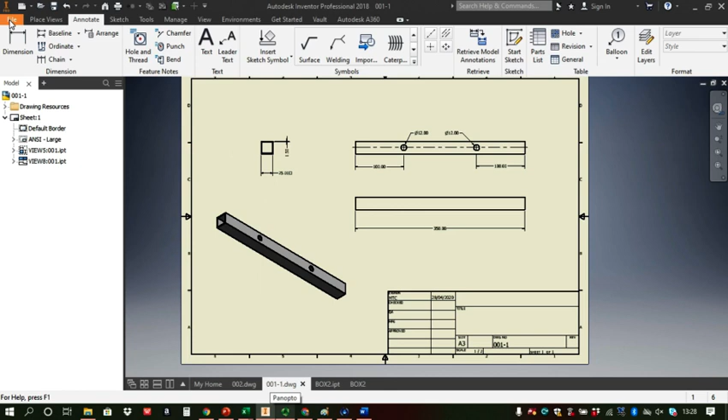So simply on Inventor, and just to demonstrate that, if I have a drawing such as this one, I can go File, and eventually it will come up, Export to PDF. And as soon as you export to PDF, it will give you that file as a PDF, and allow you to upload it to the classroom nice and simply, and guarantee that I can view it.

Now, on the 21st of September, when you hand in, I will only have a few days to mark everybody's work and get it to WorldSkills UK in order to make sure that we have time to book hotels, get the list out, get the invites out, and everything else that's got to be done in order for you to compete in November. So if you make the mistake of not putting the PDFs in there, there's a chance I will not get a chance to ask you for them. So please try and make sure that you've got the right information in the right places and this section done as PDFs.

So once you're in the classroom, as we've just demonstrated, there are several categories. National Brief contains the brief for the November finals, Qualifier Brief for that, YouTube video links, with some videos to help you and guide you through. Competition readiness, so supporting documents. There's a nice little document about competing and the kind of things we're looking for, and your team evidence upload.

So whatever your team name is, please don't upload it to somebody else's, and if you can, make sure your team name is on every single document. Okay, so the qualifier brief. The brief concentrates just on some elements, so obviously I've had to adapt things and change things to suit the current situation. So it's only elements of the full national brief and elements that can be completed using remote working and IT only. You're asked to complete each of the criteria and upload the evidence for this to the Google Classroom, as we've just gone through.

And I'm just going to depart from the PowerPoint again and just show you how to do that for those who don't know. Okay, so I'm in Inventor now, and I have a simple 3D model, a piece of box section with 2 drilled holes in it. And what I'm going to do is I'm going to right click up on the top left hand corner, and I'm going to go to iProperties. So the master on the box, right click, and I will get this up.

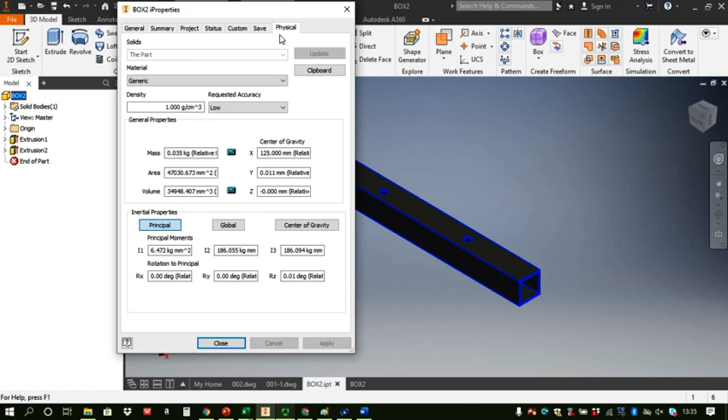Okay. At the end is the category physical, and physical will at the moment just say generic material. It won't tell me what the material actually is. I've got to tell it. Now, you may be making it out of steel, aluminium, it could be a plastic part, whatever it is. So on this drop down menu, let's say it's polycarbonate, then we go to polycarbonate. This is actually made of steel, and to be honest, it doesn't matter which steel you select. Inventor has a default density for that, and it will work it out to that default density.

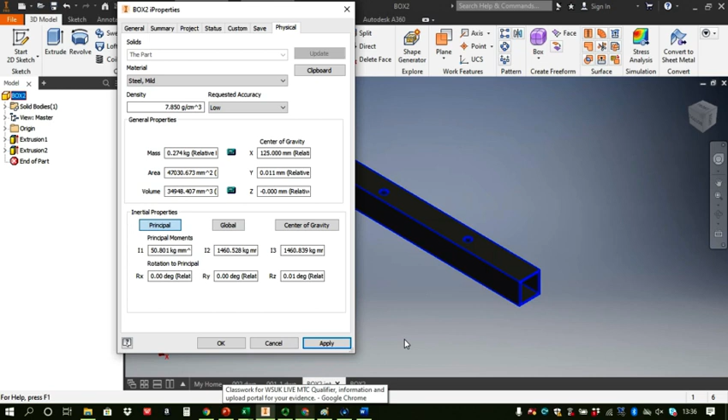So I'm actually going to go for mild steel, and it tells me the density is 7.85 grams per cubic centimetre, which is about 7,850 kilograms per cubic metre, same thing. The requested accuracy, high, medium or low, doesn't actually matter, it makes very little difference. So here it tells me that the mass is 274 grams. So I can put into my spreadsheet 274 grams for that item, then the number of items and multiply it obviously, but a screenshot of that and clearly showing the part name or part number at the bottom would be absolutely brilliant. That's the best way to demonstrate that you've done it via CAD.

So those screenshots then can be uploaded onto the Google Classroom. So what I would like to see is a spreadsheet of this format showing all the weights, and 5 screenshots that you can put onto Word or Google Docs or something similar. You might even be able to tag them into the spreadsheet if you wish, clearly showing what I've just demonstrated regarding the weight that Inventor is calculating. Of course, I also need the total weight for all of the manufactured parts.

Now, I realise that you are not going to be able to do every single nut and bolt, you're not going to be able to calculate the electronic components weight, etc. So we're only looking for the total weight of the raw metals and materials and parts you've designed at this point. When we get to the national final, of course, the entire system will be weighed. So that will be slightly different, and your weight will increase obviously from this calculation. But just to give us an idea of who's designing what and how well it's designed in terms of weight, this is the way we're going to do it for the qualifier.

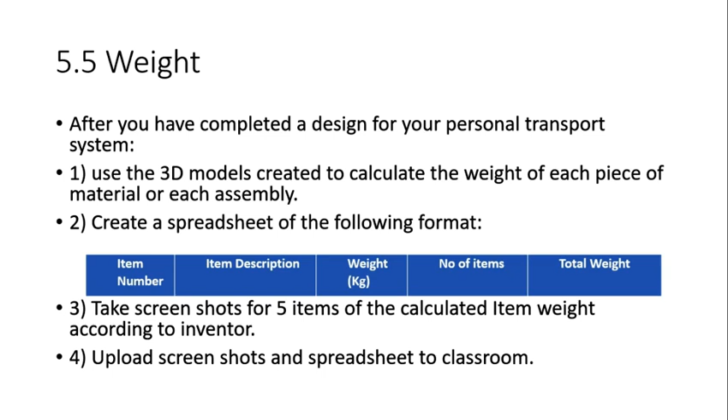So ergonomic hand controls. You will need to design your hand controls on CAD again, and I'd like to see 6 view screenshots of your hand control design. So it could be on an angle, it could be the flat elevation, so 6 sides. Can you annotate and give me a description of what it's showing? So I'm showing the left hand side, I'm showing the right hand side. This is where the dead man switch goes, but you must show me the dead man switch and the method of speed control.

Now you can do that through drawings and annotation, and also I'd like to see the size of the handle to prove it fits in one hand. It's okay seeing a drawing, but it's not relative to anything. It might be too small for my hand, it might be way too big for my hand, you might have made it 35 meters long, but I need to know that. I need to know it's reasonable to fit.

5.8, we have a manual propulsion system. Now, as discussed in the briefing video for the full national final, any manual propulsion system is fine, but it must fit either on the vehicle or be part of the vehicle, or it must fit in the rucksack with the vehicle. So I need a design for that manual propulsion system, or I need to see a part assembly for that manual propulsion system, and I need you to annotate, write out exactly how that works.

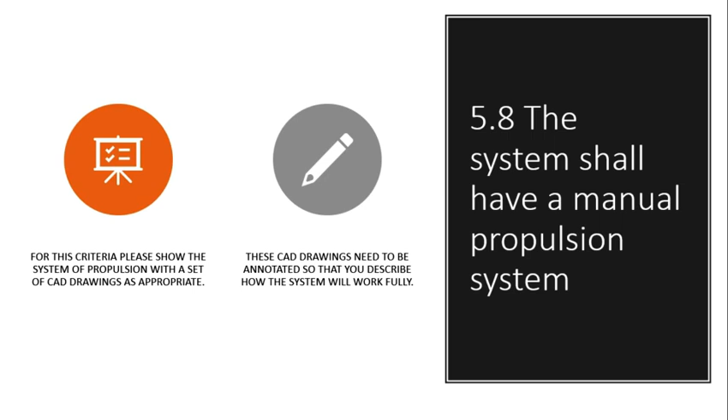So for example, it may be a ratchet where you pull a front handle on a scooter and the ratchet moves the front wheel, in which case I need you to describe what the ratio of gearing is, how far it will travel on one pull, and all the other details pertinent to that system, as well as some very, very clear drawings to show how it works.

Stopping in a safe distance. So for this criteria, I need you to show me how the braking system works with a set of CAD drawings similar to the previous one. And again, these need to be annotated to describe. So for example, you may have a brake caliper from a push bike on a wheel. So I would need to see the wheel, the caliper, the brake disc, and the mechanism of actually activating the brake pads.

So that could be a hydraulic system off a push bike, it could be cable fed off a push bike, you may have a completely different system and you may be using electronic braking on the motors. Whatever it is you do, I need you to be very specific and tell me what it is and how it works, and show me the drawings for the entire braking system from one end to the other, how it's controlled, etc.

Speed test then. Clearly we can't do a speed test, you won't have a physical item and I won't be with you. Normal qualifier, we'd have had a bit of fun running this up and down at a distance to see how fast you could go. So what I'm going to have to resort to for this time is you will know the rated motor speed for your motor or motors that you're using to power the item. You will know the gear ratios, if there are any. You will know the pulley ratios, if there are any. Any kind of gearing used, you will know those ratios, and you will know the wheel diameter you're using.

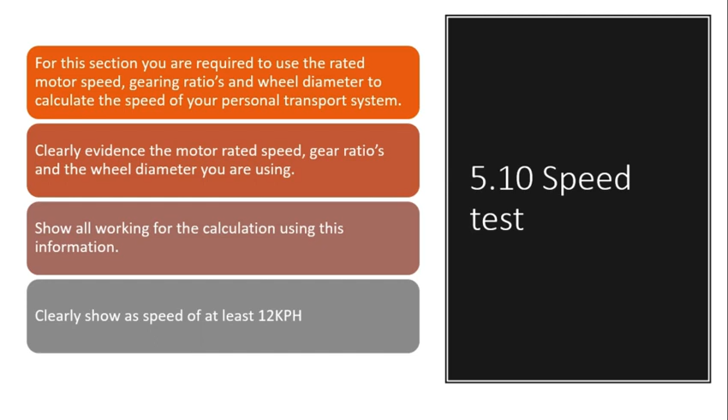So I need you to use that to calculate how far a wheel will turn in one rotation, and then multiply that by the revs per minute, and of course work from that and get the kilometers per hour. So you need to show all the workings for the calculation, and you need to clearly show that the speed is at least 12 kilometers an hour. And I will check some of the calculations randomly. If the calculation is wrong, you won't get the mark. If the calculation is below 12 kilometers an hour, you still won't get the mark, because obviously you've not designed it to meet the specification required.

5.11 system interface, you have two choices for this. You can either use a voice system to give battery level and speed in 2-minute intervals, or you can use an augmented reality type system whereby there's a monocle or a heads-up display or something on goggles, or an LCD panel mounted from a helmet that is within view but not blocking view, to show the battery level and speed. So for either of those, could you please firstly specify which one you are going for, because each of the two systems attracts slightly different marks. And can you provide a schematic diagram for that system?

So your wiring diagram, it might be that you're using an Arduino Uno, in which case you can just use a block diagram for the Arduino Uno. If you're using the Arduino Uno to program the Atmega 328P chip, and then you're taking that out and putting it into a different circuit, you will need to show the whole circuit. But either way, you will also need to show how it's connected to the LCD panel, the type of LCD panel, any interfacing circuitry, and any cut of power.

For example, the Uno runs nicely on 5 volts. It tends to fry on 12. So if you're using a 24 volt system, then obviously you're going to need some way of cutting the voltage down, and you need to show how that's done as well. So we need a schematic diagram for the system, and also please provide the program you're using and the programming method.

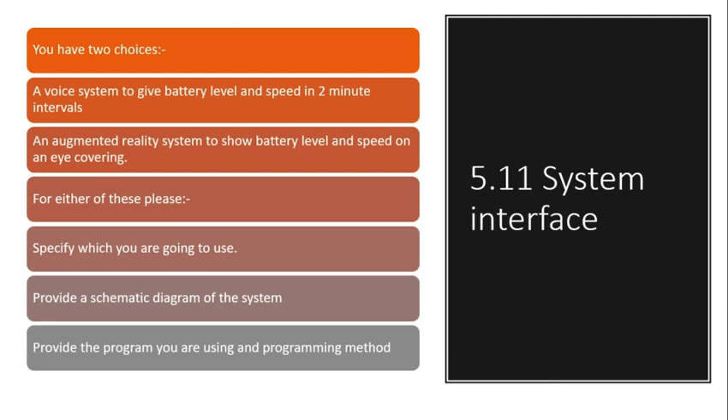So 5.13, flashing lights. So the system actually requires flashing lights on the front and back. Two small LEDs that can't be seen by other road or pedestrian users in the area is no good. So we need a nice flashing light system that actually shows to local people in the vicinity of your vehicle that the vehicle is active and moving. It can be any colours you like. There's nothing that says it has to be amber or green or red or whatever. Any colour you like, a selection of colours, don't mind.

But in order to prove that that's there, what I would need from you again is the mounting position of the flashing lights, highlighted from your CAD drawings, showing these holes are where it goes, or this is a picture of the lights actually attached. And from that, you need also to provide the circuit schematic that does that.

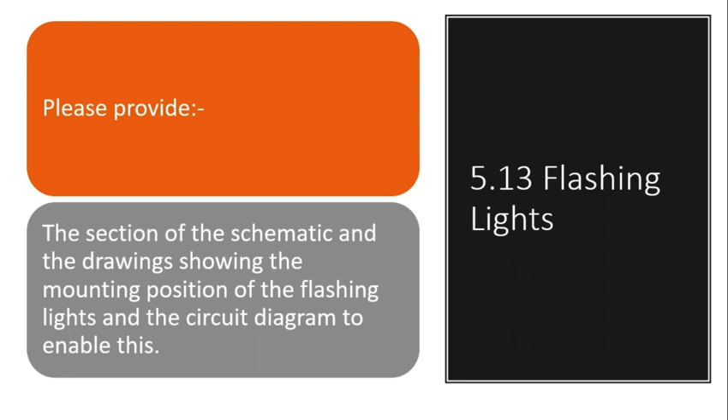So you might have bought flashing LEDs and there may not be much of a schematic, in which case please say so, but it will still somewhere connect to a battery via the switch system to say when it's going or not. You may have an astable multivibrator running it, in which case I'd like to see the schematic for the astable that you're using, and again how it connects through the switches to the power supply, etc.

5.14, onboard charging system. Now there are two charging systems required, one to charge the battery for the personal transport vehicle. Don't want to be removing batteries to charge it when we sell it to the public. And the second one is a USB point to charge phones or other similar devices. So in order to prove that that's there for me, I need you to give me the schematic and drawings showing the mounting position and the connections for the charging system and circuitry.

As I said in the full briefing, I would prefer if you used a charger that was already down to 19 volts or 24 volts or below, really. Absolute maximum cut down of 50 volts, something similar to what plugs into your laptop perhaps, or your phone, that kind of thing. And actually cut the voltage before it goes into the personal transport system. I don't really want 240 volt connections. That's not safe under the circumstances we're working, without lots and lots of quality checks, which in the competition you won't have time for.

So if you could just represent the transformer box that you're using as a block diagram, but then show the regulation circuitry and overload and charge circuitry that you're using for the charging of the battery, and for the USB system, any regulation that you have to cut your battery voltage down to the USB 5 volts.

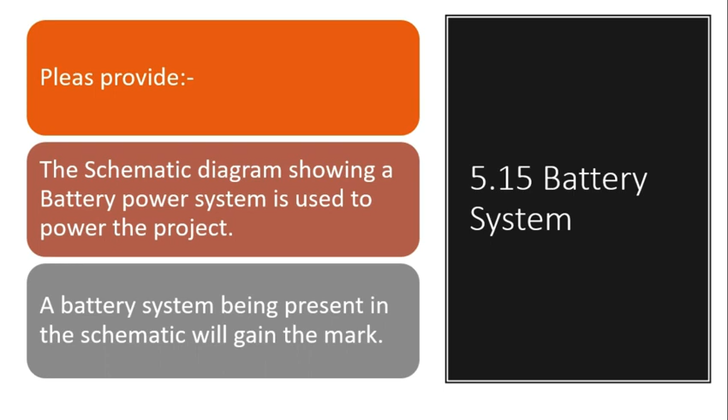Distance covered. So you've worked out the speed that your vehicle will do, yeah, so you can use that calculation now to work out how long it will take you to cover 3 kilometers, and how much battery power you will use for 30 minutes is a separate calculation. You need to add the two together, so your 3 kilometer distance run might take 20 minutes, which means you need an extra 30 minutes to that, total of 50 minutes run time at least.

You might find that you can only cover 3 kilometers in an hour, in which case it would need to be an hour and 30 minutes. You might be able to do 3 kilometers in 10 minutes, in which case it would need to run to 40 minutes. So it's going to be individual to your particular design and the speed of that design, and of course calculating for the weight and motor torque and all those other things.

You've got to take a few of those into account, but ballpark figures is fine for that. Okay, so I've now discovered that I'm going to run for 50 minutes, and I know the rating of the motor or motors and how much current they're going to draw at that speed, so I can then work out exactly how much battery charge I'm going to need to do it, and then you design in your battery to do that. So if you can prove that the battery is big enough to cover for 30 minutes runtime plus 3 kilometers, so a few simple little calculations there, the marks for this are given as well.

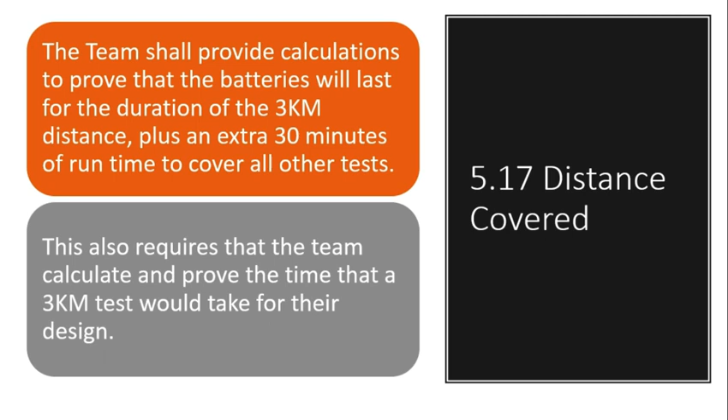The packed volume of the personal transport system then. So on the actual national competition, we're going to ask you to put it into the rucksack, and we're going to measure it from its maximum extremities, so maximum length, maximum width, maximum height, and we're going to calculate the volume from that. So again, I'm going to ask you to do exactly the same here.

So once you've done your CAD assembly, can you do an assembly of it packed as it should be with all parts on it? And on the assembly, the maximum extremities need to have measurements put on them. So if you create a drawing of that assembly with X, Y and Z planes clearly measured, that would be absolutely fabulous. That shows it brilliantly. You can use the X, Y and Z measurements to then calculate the volume of the project.

What we then do is I'm going to put that into a spreadsheet and compare everybody's, and basically the team with the smallest volume will get the high marks, the team with the largest volume will get 0 marks, and everybody else will be graded proportionally in between. So there's a little bit of a problem with this one. From your point of view, you don't know how big or small everybody else is making it. So you might think, right, I've made the most fabulously wonderful push bike that folds into the tiniest space, it's barely bigger than a wheel, and somebody else comes up with a design that's half the size.

You just don't know. So from that point of view, you need to really consider how you're going to do the project and what's the smallest area you can get it into. But bear in mind, a small vehicle might have more trouble going over the sand and gravel in the final than a large vehicle like an e-bike would. So it's a kind of a trade-off.

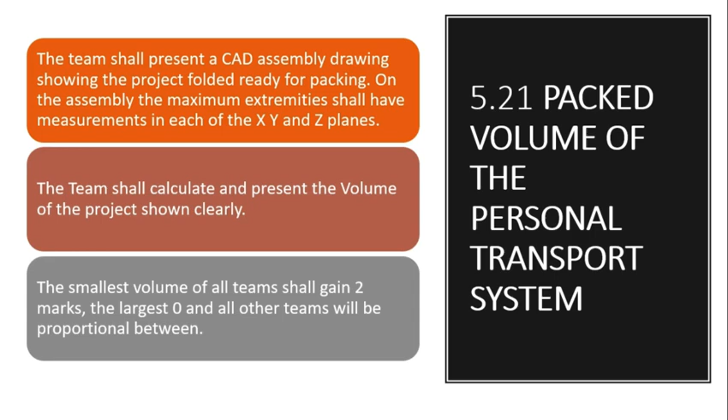Okay, costings then. So for Portfolio A, you are required to give a Gantt chart in, and that's part of the Portfolio A, and Portfolio A and Portfolio B remain pretty much identical to the national finals. So for Portfolio A, you've already created your Gantt chart, so you can use that Gantt chart to work out the total amount of time.

Now bear in mind you have from 8:30 in the morning till 5 p.m. Thursday and Friday, plus a lunch taken out of that. You might only take 30 minutes for lunch, you might take an hour, and any other breaks. So in total you've got somewhere around about 16 hours. You may have a bit of tinker time on the Saturday morning depending on where we go and if it's needed, of course. So working on that, 16 hours roughly, a little bit more maybe, a little bit less maybe, depending on how many breaks and length of lunch, etc.

So you might take the full 16 hours, and to be fair, most teams will get close to that. However, you might only need to take half of that. You might think you can do it all on one day and only take 8 hours. That's great. As long as your Gantt chart provides enough evidence that your main project and everything else can be done in that time, I'm happy to take your estimate.

Now, you will also be able to calculate the time taken on machinery from that, so you'll know how long a piece should take your machinist on a lathe. You'll know how long your welder needs in a welding booth. And I am aware that these are just estimates, because until you actually start to build it, you really don't know. But try and make them genuine estimates. And for the surprise project, at the national finals, they're designed to be around about 3-hour tasks.

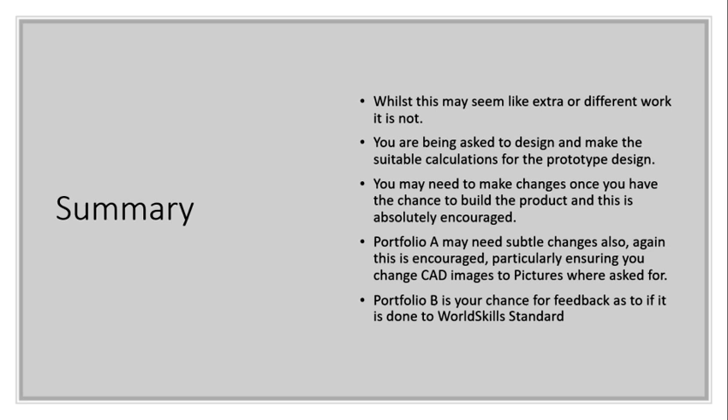And though social distancing has necessitated this change to the format, principally, we are still looking at what's going to be going on at WorldSkills Live. There might be a change in format, there might be less public allowed into view, there might not be any public allowed into view, although I very much doubt that would be the case. There are a few things that we're looking at that may or may not happen depending on the circumstances with lockdown and also the circumstances and guidance given to us by the government at the time. But in some format, some way, this competition will be going ahead.

We will be awarding medals, and of course this year is not a selection year for an international squad. Next year is the international squad selection, so it's still a very, very good training ground for those who think, right, I'm going to come back next year stronger, better, learn from this experience, work out what it is I need to do, because I want to get into squad and I want to represent the UK in Lyon in 2023. So for those people, this is still going to be very good training, and to be honest, having to move to an IT-based system has meant I've given you a lot more support than I maybe would in previous years. Getting through to squad is when the support from me normally occurs, but you're getting quite a lot of it now, so you should be in a very good place to do that.